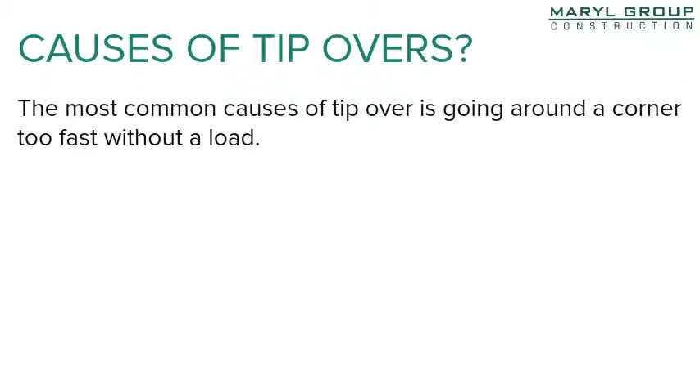Causes of tip-overs: the most common cause of a tip-over is going around a corner too fast without a load, or turning with the forks above travel height, loaded or unloaded. Handling a load that is too heavy for the Gradall does not cause as many tip-overs as one might think. Why? Because when engaging the load, the Gradall gets light, and we learn to keep such a load close to the ground.

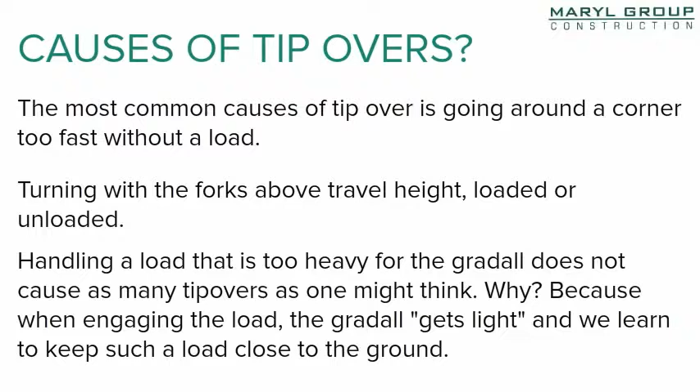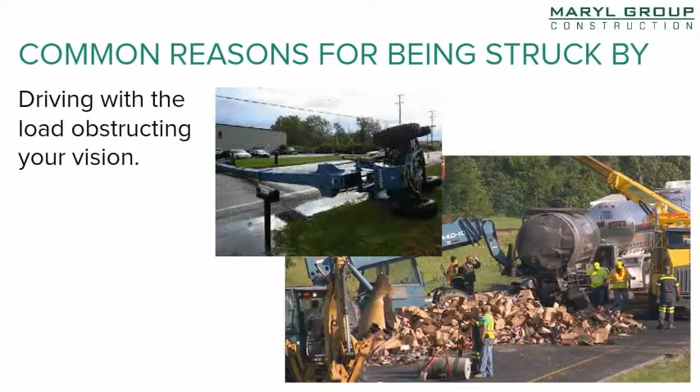Common reasons why workers are struck by Gradalls occur when driving with the load obstructing your vision, turning and not watching the rear end swing of the Gradall, or backing up and not paying attention.

Think before you act. Accidents that cause injuries and death come suddenly, and everyone is left scratching their heads wondering what went wrong. Usually it is because they have been cutting safety corners for years and the odds finally caught up to them. After the accident, it becomes evident that they weren't being as safe as they thought they were.

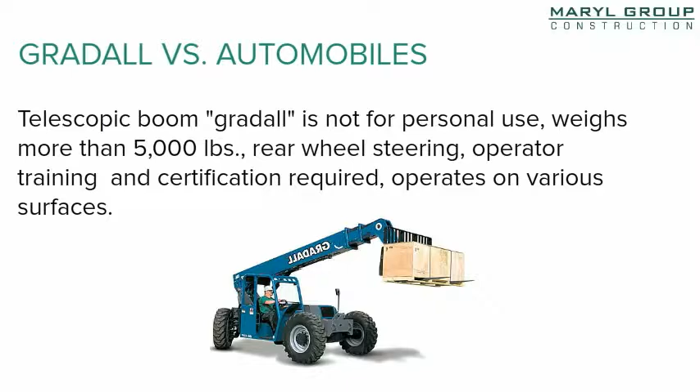How do Gradalls compare to automobiles? First off, a Gradall is not for personal use. They typically weigh more than 5,000 pounds and have rear wheel steering. Operator training and certification is required, and they operate on various surfaces. Automobiles, on the other hand, are for personal use. They typically weigh less than 5,000 pounds, with front wheel steering. They also require training, but operate mainly on paved roads.

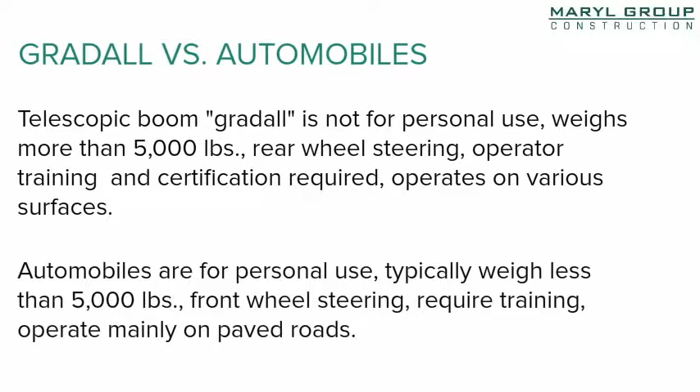The operator and maintenance manuals are required to be on board at all times. All operators are required to understand these manuals prior to making any lifts, and must conduct daily and shift inspections before any lift occurs.

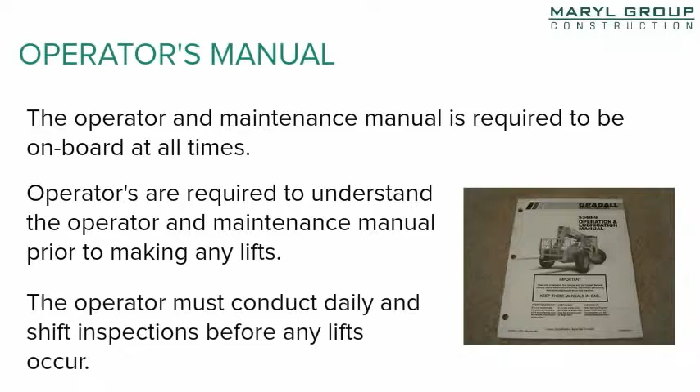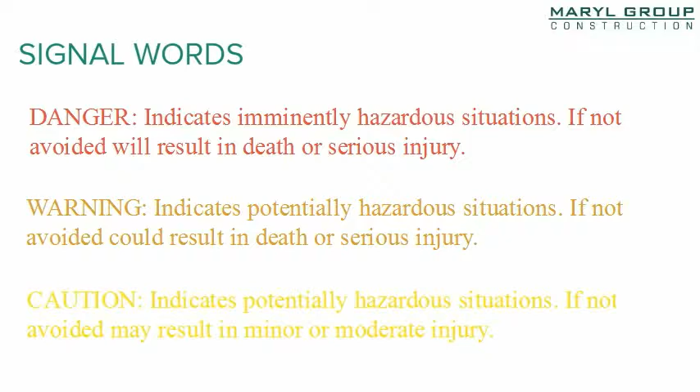All the telescopic boom lifts on our site will include the key signal words, with danger indicating an imminently hazardous situation that, if not avoided, will result in death or serious injury. Warning also indicates death or serious injury, and caution indicates a potentially hazardous situation that, if not avoided, may result in minor or moderate injury.

All the Gradalls on our sites will display these key signal words along with a message about the potential injury situation. Familiarize yourself with where the different warnings are located on the telescopic boom forklift that you are operating, and also familiarize yourself with the situations that can cause an accident and how to avoid them.

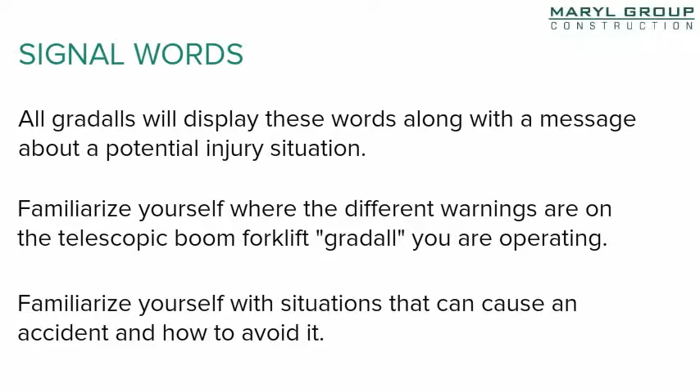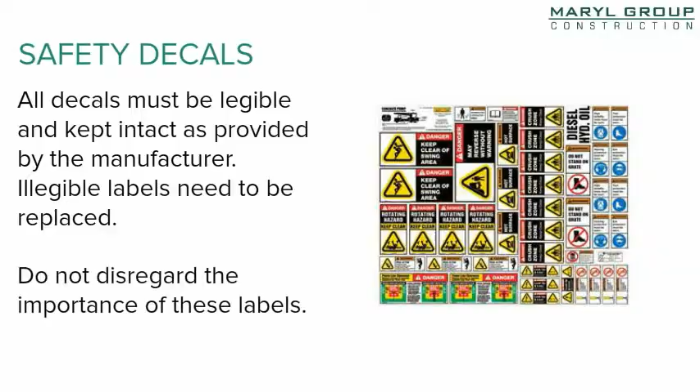Safety decals: all decals must be legible and kept intact as provided by the manufacturer. Illegible labels need to be replaced. Do not disregard the importance of these labels. Each of these components will be discussed in more detail later in this training. Also, telescopic handlers vary somewhat from manufacturer to manufacturer.

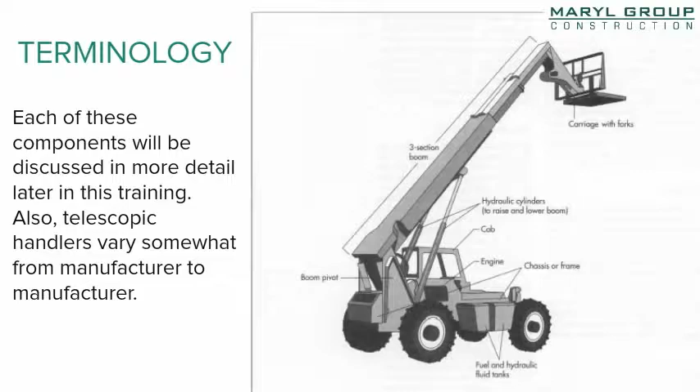Pre-operation visual inspection should include checking the overall condition: the frame, tires, forks, overhead guard, engine compartment, electrical equipment, control labels and markings, and also the operator's compartment. This inspection must be done at the beginning of each day or shift to ensure that no hazards are present. A significant number of forklift accidents occur as a result of faulty equipment, which would have been identified if a pre-operation inspection had been performed prior to use by the operator.

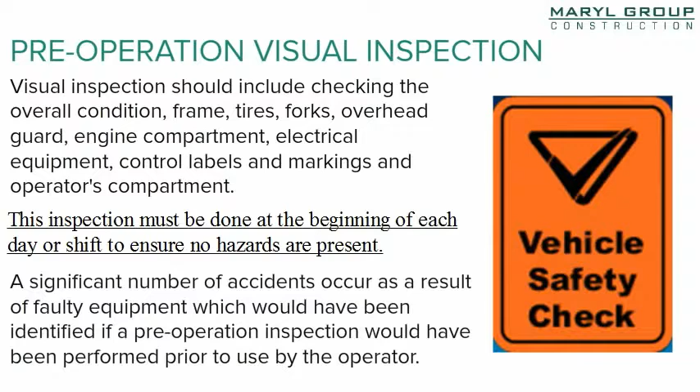Pre-operation inspection: damaged overhead guards should be repaired, as damaged guards will not adequately provide the protection necessary from falling objects. Inspect suspension systems for loose bolts. Ensure the operator cab is clean with no grease or mud, to prevent slipping. Gauges and controls, along with labels, need to be clean and legible. Check for leaking fluids such as fuel, coolant, hydraulic fluids, etc. Check for structural welds and cracks, and check the engine compartment to ensure that it is safe and clean.

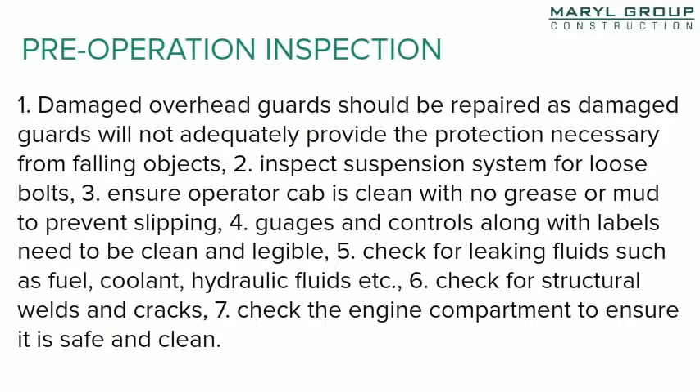Operational inspection: ensure that the seatbelt is functioning properly. Test warning devices such as the horn, lights, and other devices. Check all gauges to ensure that they are functioning properly. Test hydraulics by extending and retracting the boom. Verify steering by turning the wheel completely from left to right. Test the parking brake and service brake, and test sway controls. Any control that functions erratically or is slow to respond needs to be repaired prior to using the Gradall on any Maryl Group construction projects.

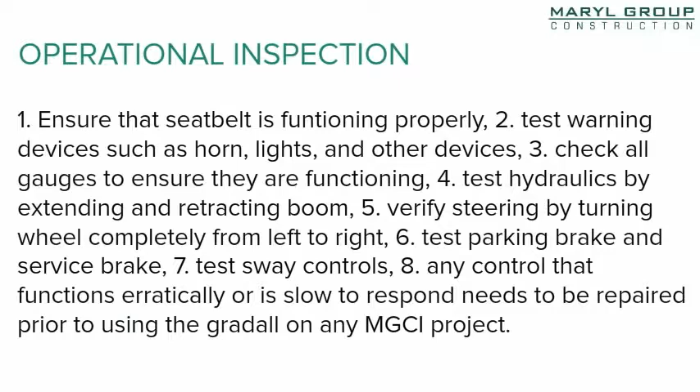After the completion of the inspection, report all defects to the Maryl Group construction supervisor. Never operate a Gradall or any equipment in need of repair, and only authorized and trained personnel will make the repairs.

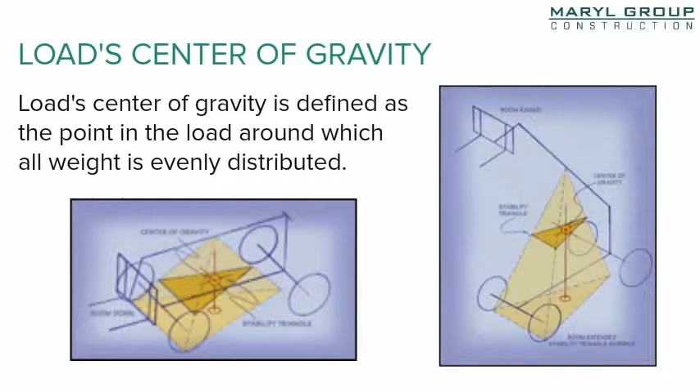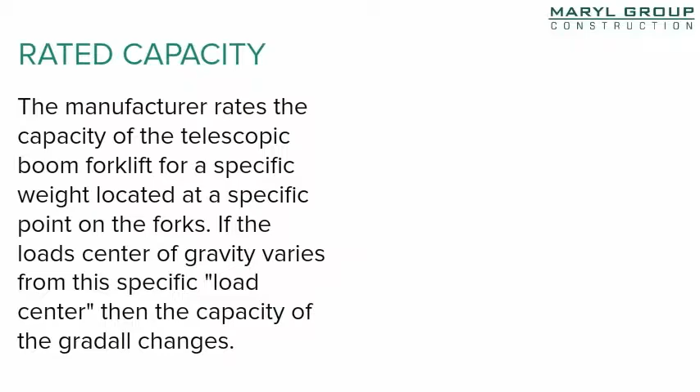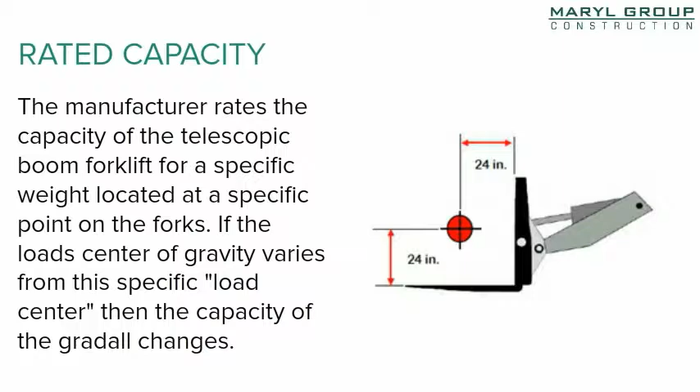Telescopic handler stability: the front wheels are the pivot point of balance in the fore and aft directions. The machine center of gravity, or CG, will be somewhere in the vicinity of the engine. The weight of the machine behind the front axle times the distance from the axle to the machine center of gravity produces the offsetting torque.

The weight of the boom, forks, and the load ahead of the front axles times the distance from the front axle produces a tipping torque. The offsetting torque must always be greater than the tipping torque.

The offsetting torque is basically fixed and remains constant. The tipping torque can be increased by increasing the load weight or extending the boom out, or both. When the load is lifted, a combined center of gravity is produced and will always be on a straight line between the load's CG and the machine's CG.

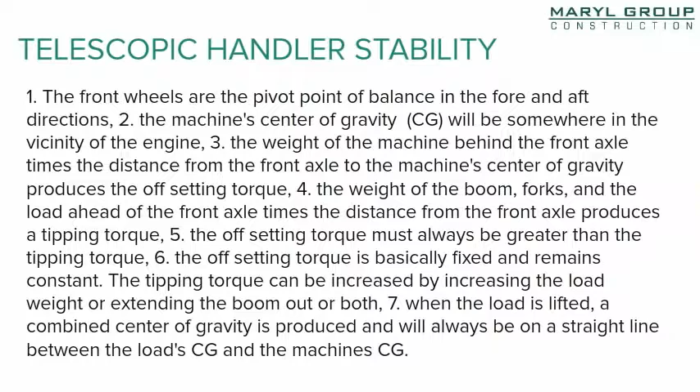Changing stability: the combined center of gravity will move forward as the load is moved forward by extending the boom. If the combined CG, or center of gravity, moves past the front wheels, the machine will tip forward.

As the load is raised, the combined center of gravity will move upward also. Note that the combined CG will move backwards slightly when the boom is raised, but not extended, as depicted in the picture. A high combined center of gravity has its greatest impact on stability when the machine is moving.

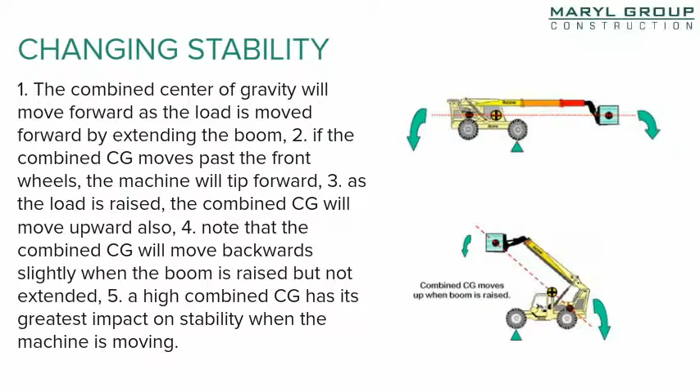Changing stability: extending the boom with a heavy load will result in the machine tipping forward if the tipping torque becomes greater than the offsetting torque. Operators need to be cautioned that a load that is stable close to the machine will become less stable as the boom is extended, and the weight of the load along with the load chart needs to be taken into consideration before extending any loads.

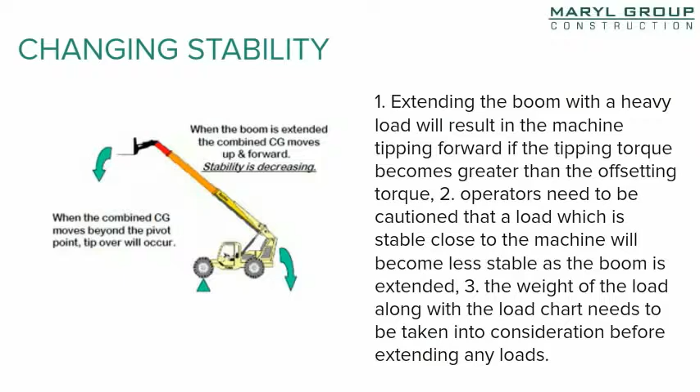Lifting capacity chart. Make sure that you review each part of this chart. When the letter becomes visible on the boom as it is extended, the lift capacity is then reduced to the next lower capacity, regardless of how little the boom is extended beyond the visibility of the letter.

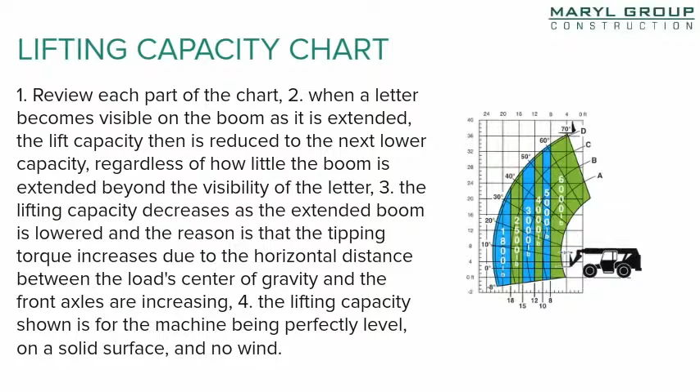The lifting capacity decreases as the extended boom is lowered, because the tipping torque increases due to the horizontal distance between the load's center of gravity and the front axles increasing. Also remember, the lifting capacity shown is for the machine being perfectly level on a solid surface and with no wind. The lift capacity chart must be legible and visible to the operator.

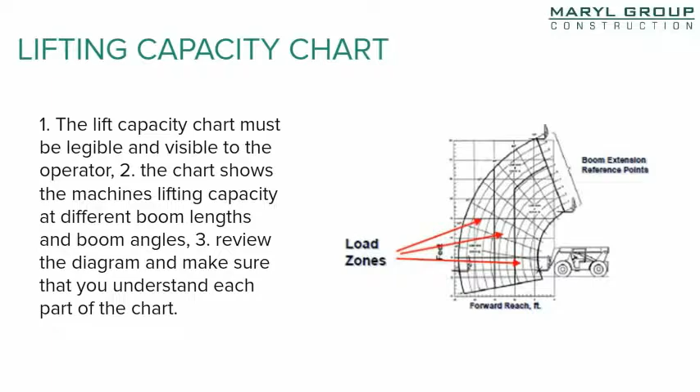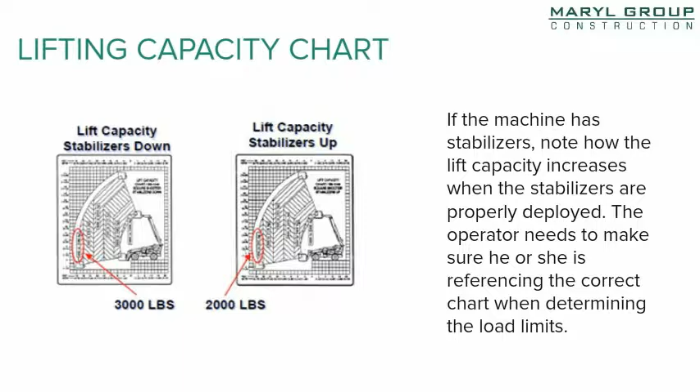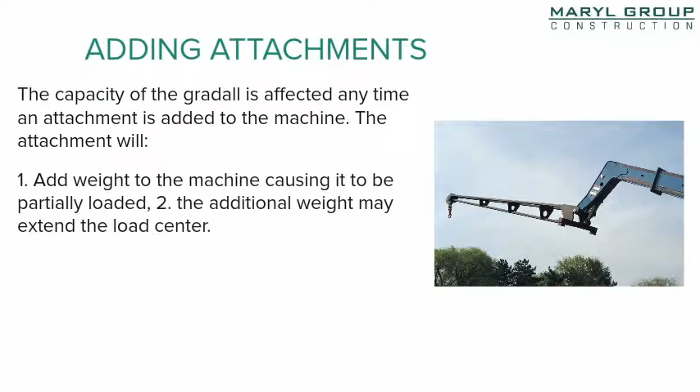Adding attachments: the capacity of the Gradall is affected any time an attachment is added to the machine. The attachment will add weight to the machine, causing it to be partially loaded. The additional weight may extend the load center. Remember, adding an attachment to the machine requires manufacturer's approval and a new capacity plate installed when using the attachment.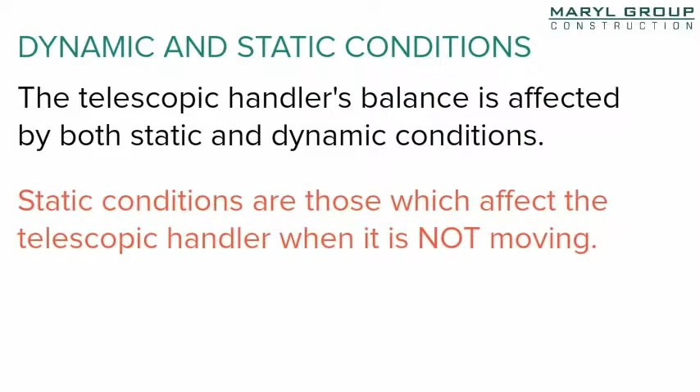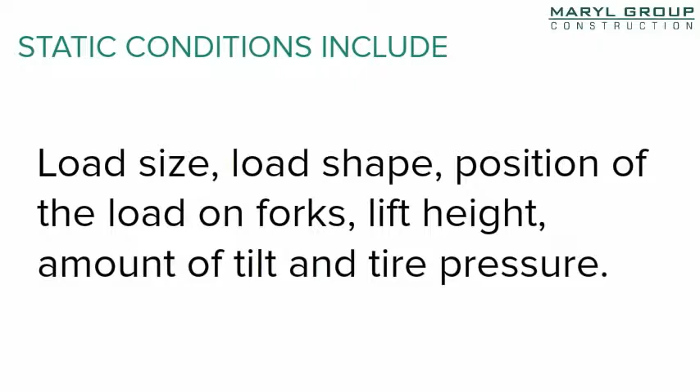Dynamic and static conditions: the telescopic handler's balance is affected by both static and dynamic conditions. Static conditions are those which affect the telescopic handler when it is not moving. Dynamic conditions are created when the telescopic handler is moving. Static conditions include load size, load shape, position of the load on forks, lift height, amount of tilt, and tire pressure.

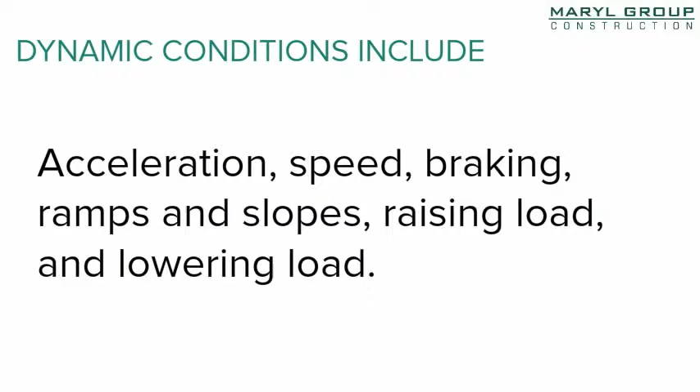Dynamic conditions include acceleration, speed, braking, ramps and slopes, raising loads, and lowering loads. The law of motion states that an object at rest wants to remain at rest, and an object in motion wants to remain in motion unless acted upon by an external force. These two laws impact the stability of the machine when moving a load. When a Gradall transporting a load stops, the load wants to continue moving, and the additional force created by this movement will want to tip the machine forward.

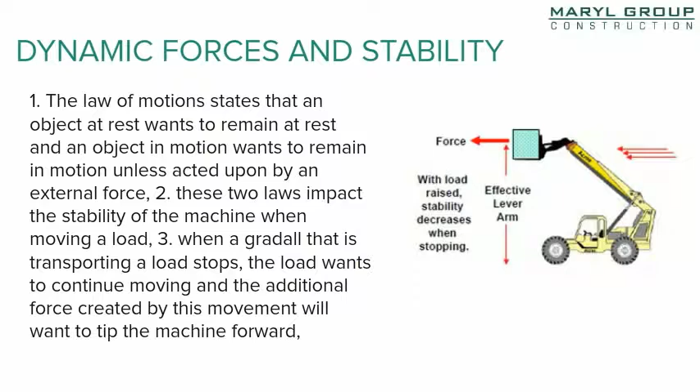The pivot point for this tipping motion is the front wheels, and the distance from the ground to the load center is the effective lever arm. The forward motion of the load times the effective lever arm will produce a dynamic tipping torque. This dynamic tipping torque is added to the static tipping torque, which the offsetting torque must oppose or the machine will tip over.

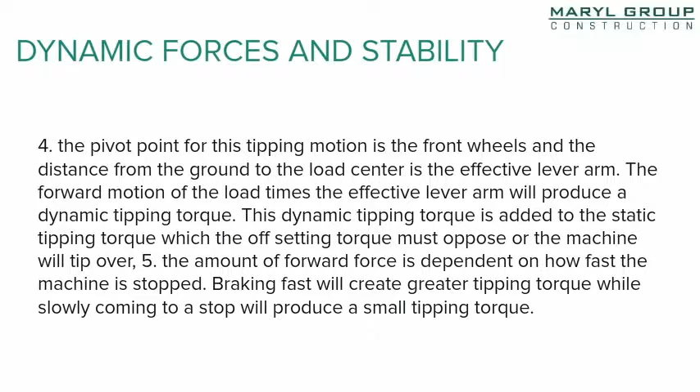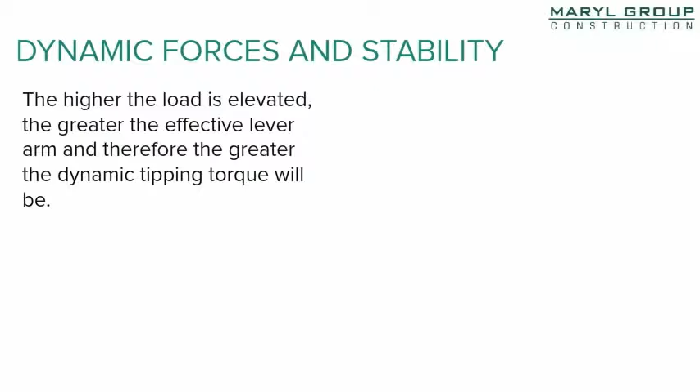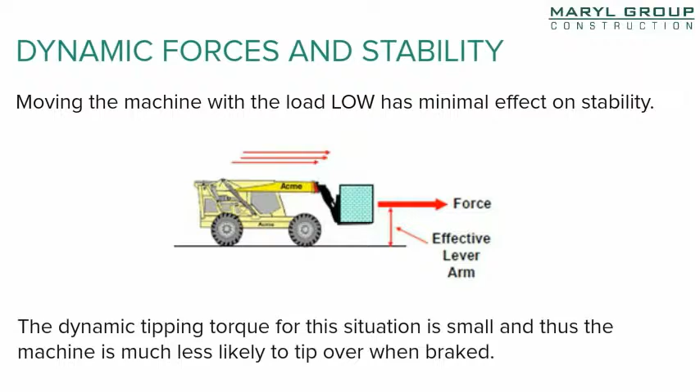The higher the load is carried when transporting it, the greater the risk for a tip over. Moving the machine with the load low has minimal effect on stability. The dynamic tipping torque for this situation is small, and thus the machine is less likely to tip over when braked. When making a turn, the higher the load, the greater the effects on the centrifugal force.

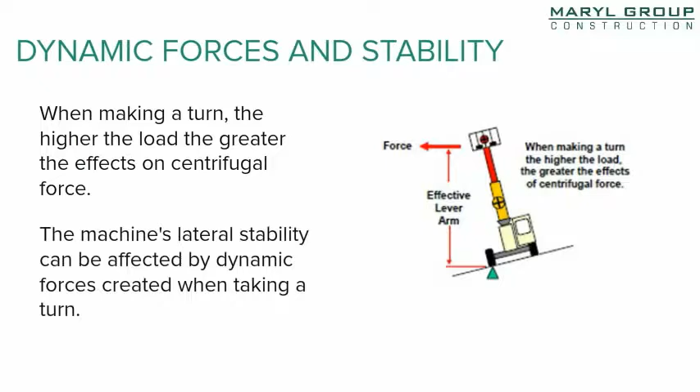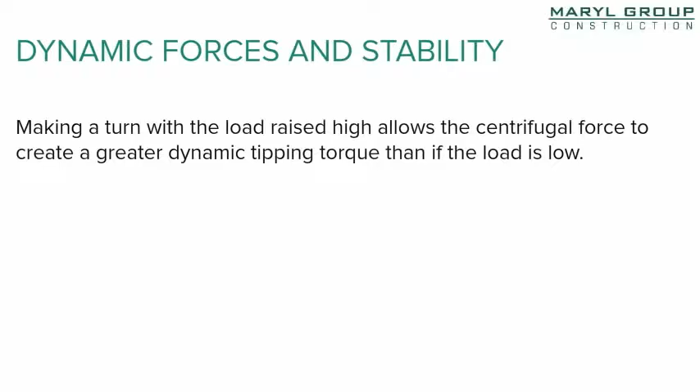The machine's lateral stability can be affected by dynamic forces created when taking a turn. Making the turn with the load raised high allows the centrifugal force to create a greater dynamic tipping torque than if the load is low. The problem becomes compounded when the machine is making an uphill turn. On level ground, the combined center of gravity will be on the machine's center line.

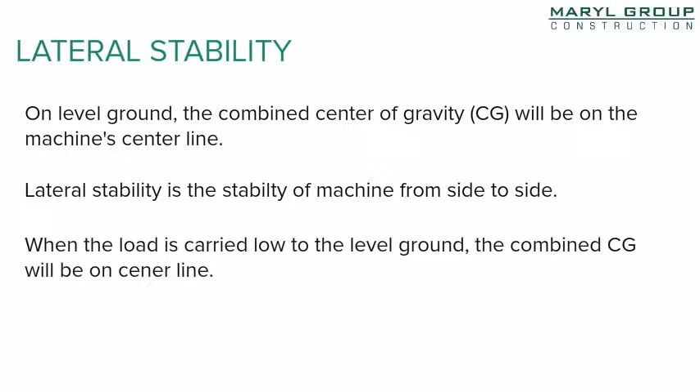Lateral stability is the stability of the machine from side to side. When the load is carried low to the level ground, the combined center of gravity will be on the center line. This is the most stable position for traveling with a load.

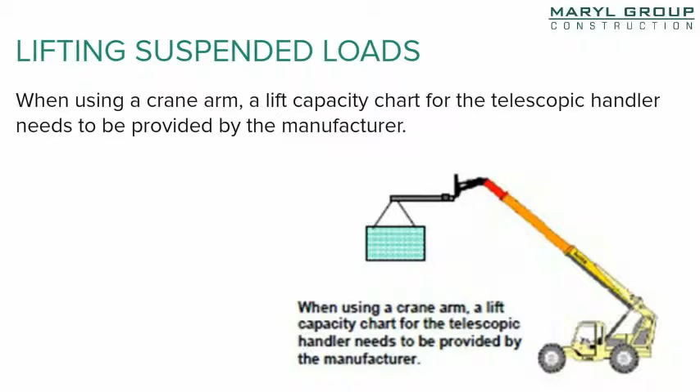Lifting suspended loads: when using a crane arm, a lift capacity chart for the telescopic handler needs to be provided by the manufacturer. When placing a crane arm on the telescopic handler for lifting suspended loads, the manufacturer needs to be consulted to determine the new lifting capacities. Care must be taken to prevent the load from striking the boom, as this could result in the boom collapsing. Crane arms must be engineered with an established capacity identified.

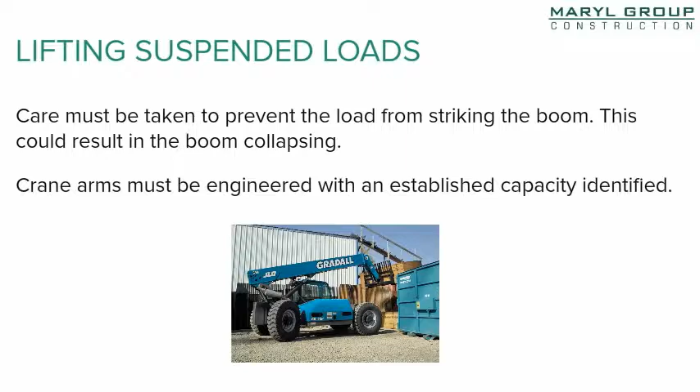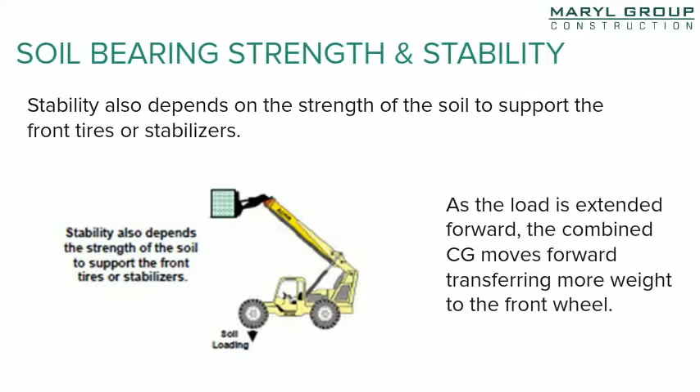Soil bearing strength and stability: stability also depends on the strength of the soil to support the front tires or stabilizers. As the load extends forward, the combined center of gravity moves forward, transferring more weight to the front wheel. The stability of the machine can change dramatically.

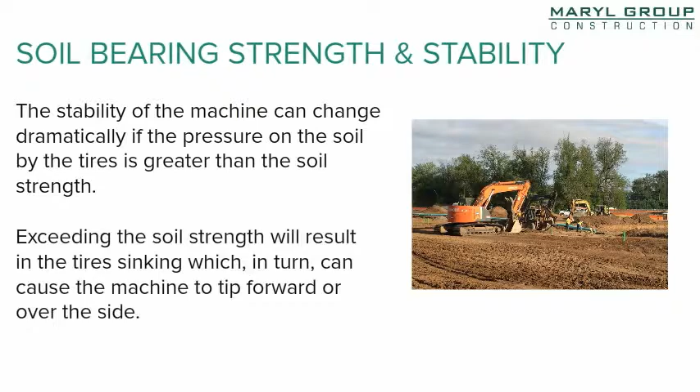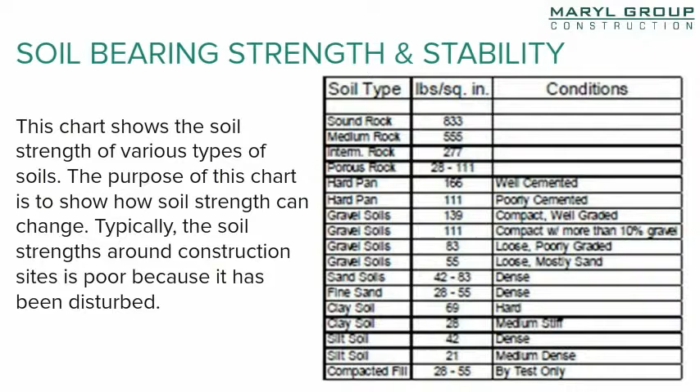If the pressure on the soil by the tires is greater than the soil strength, exceeding the soil strength will result in the tires sinking, which in turn can cause the machine to tip forward or over the side. This chart shows the soil strength of various types of soils, illustrating how soil strength can change. Typically, the soil strength around construction sites is poor because it has been disturbed.

Safe operating guidelines: only trained and authorized operators shall be permitted to operate a telescopic handler. Before beginning to operate the telescopic handler, the operator must always fasten his or her seatbelt, place directional controls in neutral, disengage the clutch on the manual transmission or apply the brake on the power shift or automatic, and then start the engine. Always keep your hands and feet inside the operator cab and never put any part of the body into the mast structure or within reach of moving parts.

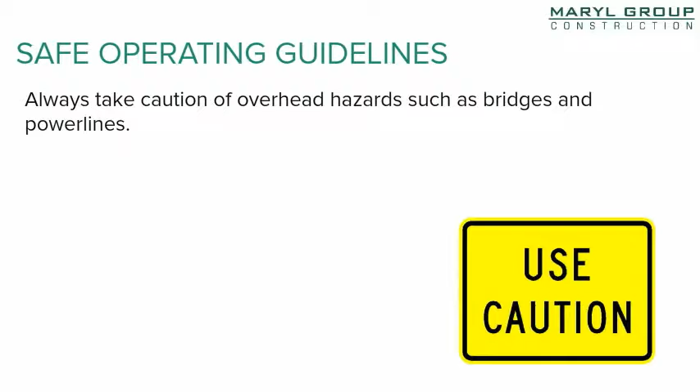Always take caution of overhead hazards such as bridges and power lines. Exercise care at cross aisles, doorways, and other locations where pedestrians may step into the path of travel. Do not allow anyone to stand or pass under the elevated portion of the boom, whether it has a load or not.

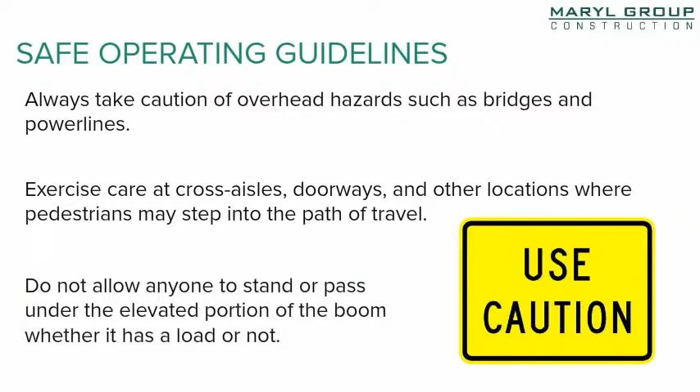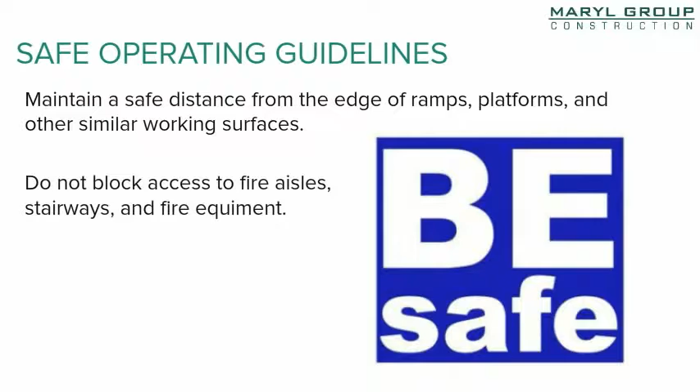Maintain a safe distance from the edge of ramps, platforms, and other similar working surfaces. Do not block access to fire aisles, stairways, and fire equipment. And never permit passengers to ride on the machine.

Attended versus unattended: a telescopic handler is attended when the operator is less than 25 feet from the truck and the truck always remains in his or her view. A telescopic handler is unattended when the operator is 25 feet or more from the truck or is out of view of the truck.

Attended parking requires the transmission to be in neutral, parking brake set, and forks on the ground. Unattended parking requires the same as attended, with the engine shut off and the wheels blocked off if it's on an incline.

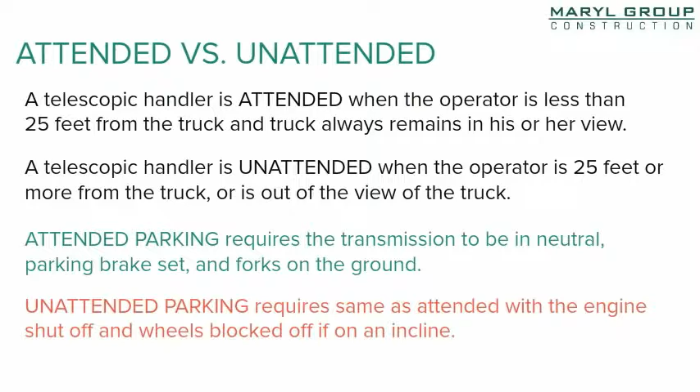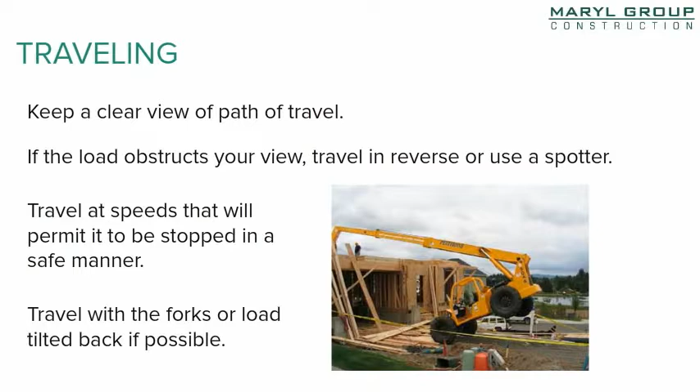Traveling: keep a clear view of the path of travel. If the load obstructs your view, travel in reverse or use a spotter. Travel at speeds that permit safe stopping. Travel with the forks or load tilted back if possible, and do not elevate the load except when stacking.

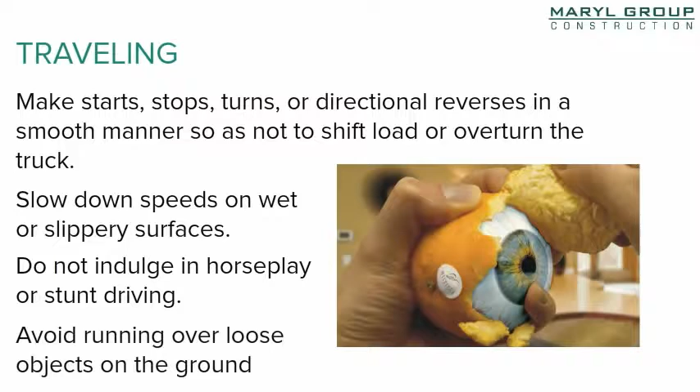Make starts, stops, turns, or directional reverses in a smooth manner so as not to shift the load or overturn the truck. Slow down your speeds on wet or slippery surfaces, and never indulge in horseplay or stunt driving. Try to avoid running over loose objects on the ground. Lateral turnover is greater when the forks are empty.

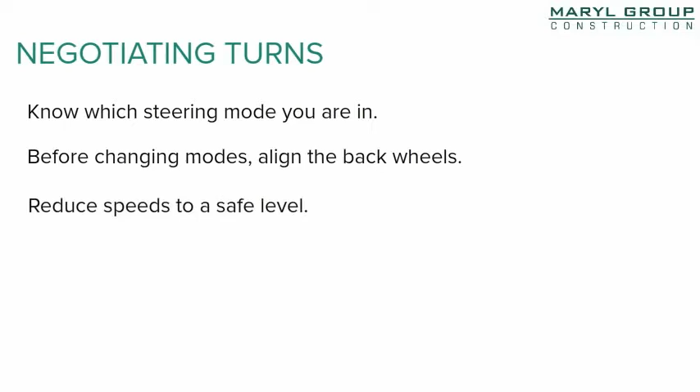Negotiating turns: know which steering mode you are in. Before changing modes, align the back wheels, and reduce speeds to a safe level. Turn the steering wheel in a smooth, sweeping motion. Never turn while the load is elevated except at very low speeds, and turn the steering wheel at a moderate, even rate.

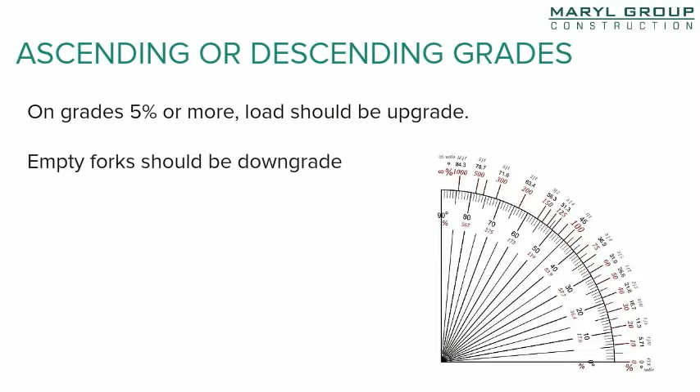Ascending or descending grades: on grades 5% or more, the load should be upgrade. Empty forks should be downgrade. On all grades, the load should be tilted back and raised only enough to clear the road surface. Avoid turning if possible; normally travel straight up and down.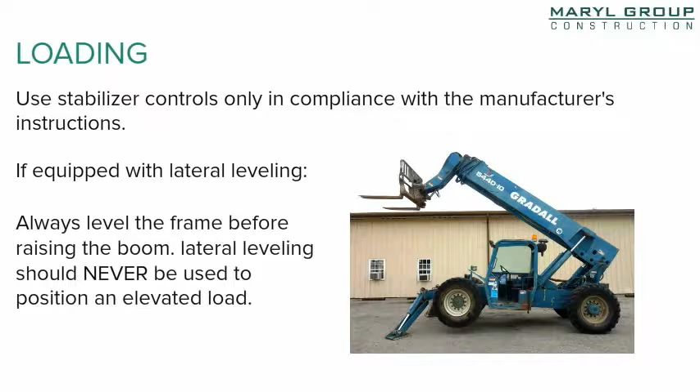Loading: use stabilizer controls only in compliance with the manufacturer's instructions. If equipped with lateral leveling, always level the frame before raising the boom. Lateral leveling should never be used to position an elevated load. Handle only stable and safely arranged loads.

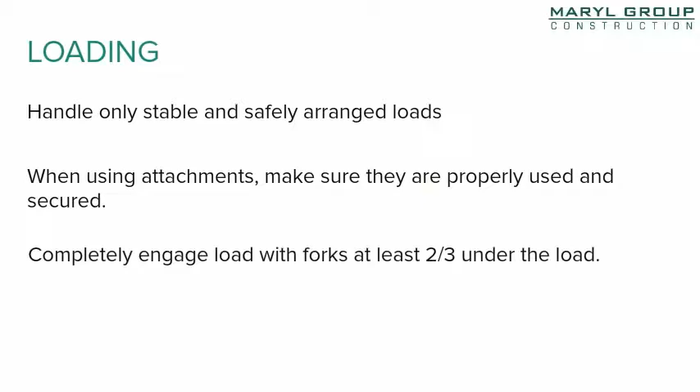When using attachments, make sure they are properly used and secured. Completely engage the load with forks at least two-thirds under the load. Use extreme care when tilting the load forward, and never use a Gradall to elevate personnel on Maryl Group construction projects.

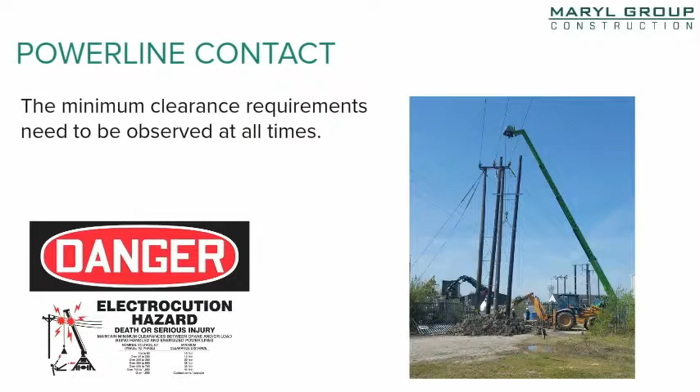Power line contact: minimum clearance requirements need to be observed at all times. A 10-foot clearance is required for 50 kV and below. 50 to 200 kV requires 15 feet. And 200 to 350 kV requires a 20-foot clearance.

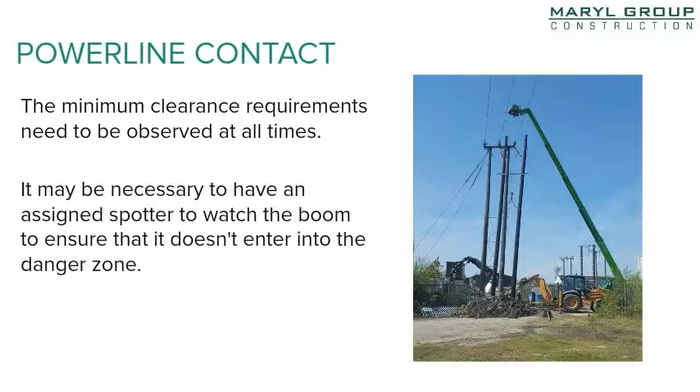It may be necessary to have an assigned spotter to watch the boom to ensure it does not enter the danger zone. Electrocution is the number one cause of death involving cranes.

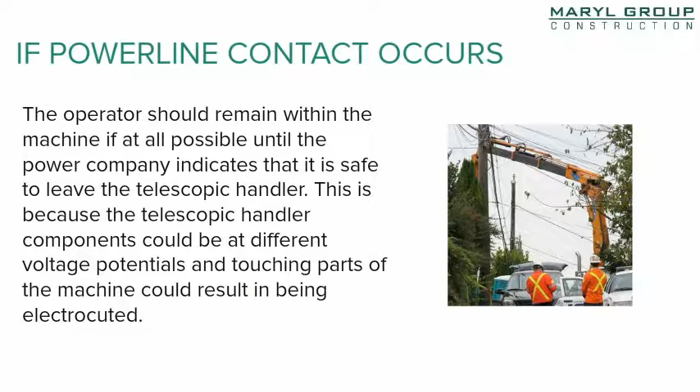If power line contact occurs, the operator should remain within the machine if at all possible until the power company indicates it is safe to leave. This is because the telescopic handler components could be at different voltage potentials, and touching parts of the machine could result in electrocution.

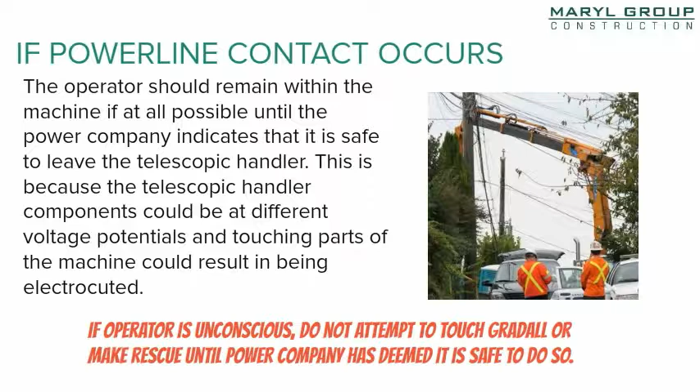If you come upon a situation where the operator is unconscious, do not attempt to touch the Gradall or make a rescue until the power company has deemed it safe to do so. If a fire occurs and the operator must leave the cab, he or she should shuffle their feet to clear the area of the power line contact.

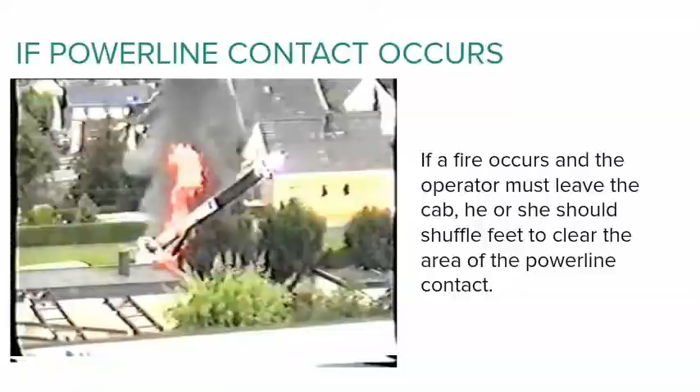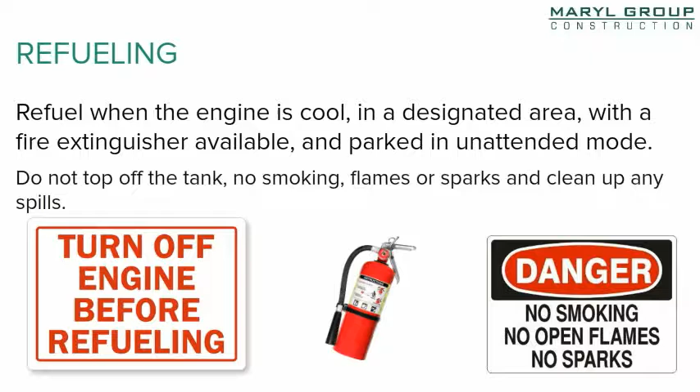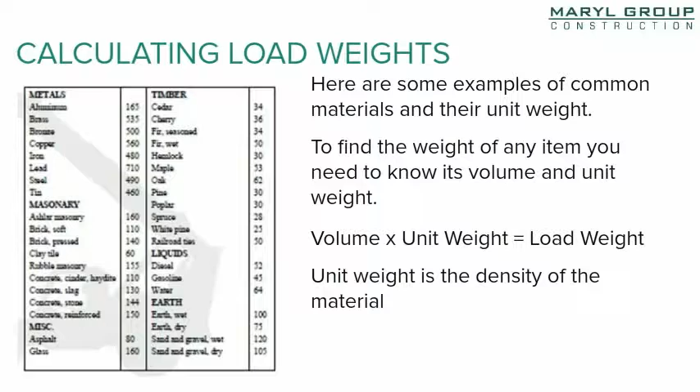Calculating load weights: here are some examples of common materials and their unit weight. To find the weight of any item, you need to know its volume and unit weight. Volume times unit weight equals load weight. Unit weight is the density of the material, normally measured in pounds per cubic foot.

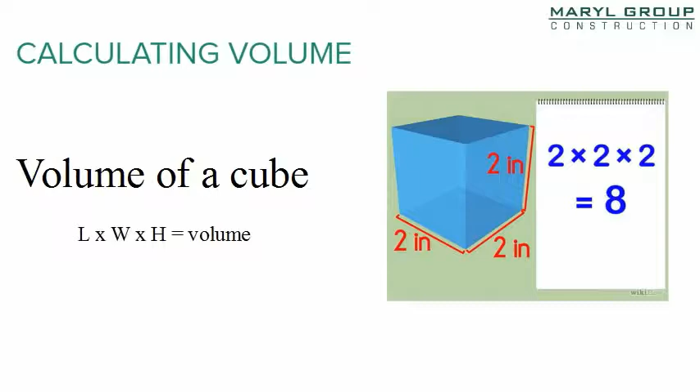Calculating volume: multiplying the length by the width by the height equals the volume of a cube. Measuring the volume of a cylinder is a little more difficult, but not rocket science. Having a scientific calculator and knowing how to use it is a good idea.

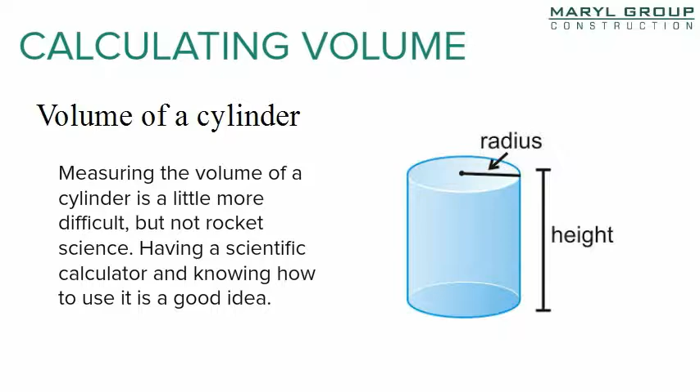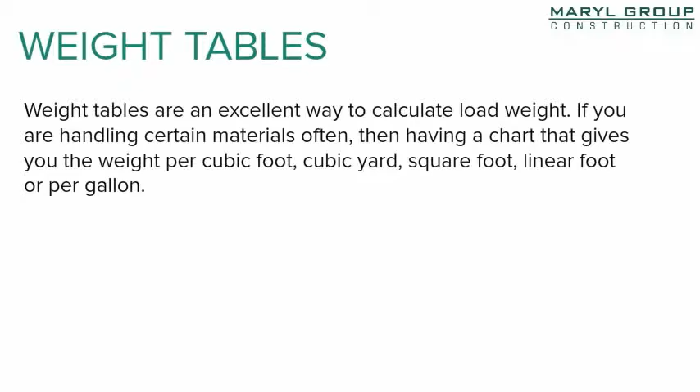Weight tables are an excellent way to calculate load weight. If you are handling certain materials often, having a chart that gives you the weight per cubic foot, cubic yard, square foot, linear foot, or per gallon would be good to have.

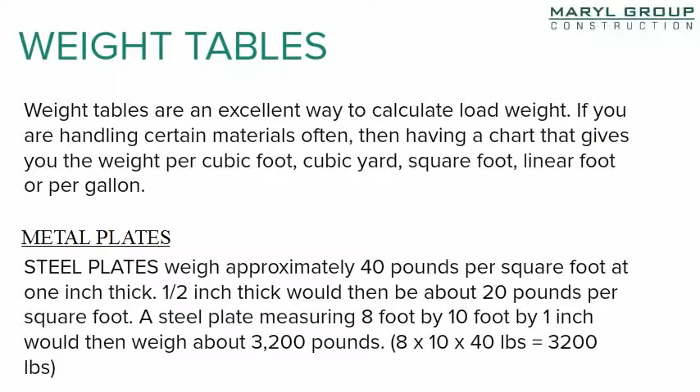Metal plates: steel plates weigh approximately 40 pounds per square foot at one inch thick. Half an inch thick would then be about 20 pounds per square foot. A steel plate measuring 8 foot by 10 foot by 1 inch would then weigh about 3,200 pounds.

Post-video practical testing: this portion of your training will be conducted by the project superintendent or project competent person to evaluate your skill level while operating on an obstacle course created at this site.

Practical test requirements will include operator walk-around visual check, use of seatbelt, proper startup, use of safe and controlled speeds, successful negotiation of cones, mirror use, head checks, fork positioning while lifting a pallet, operator able to find the center of gravity for the load, stability of the load, successful lift of a pallet, traveling with the pallet, successful pallet drop, proper shutdown, setting of the brake, fork and boom lowering, setting the truck to neutral, and engine shutdown.

This will be followed by evaluated questions, which the operator must also be able to answer, including where use and inspection checklist documents are to be kept, how frequently inspections are to be conducted and documented, and where the manufacturer's manual is to be kept, and more.